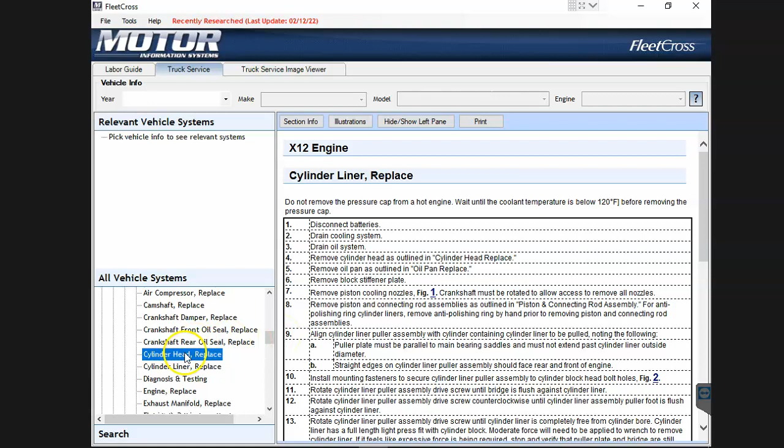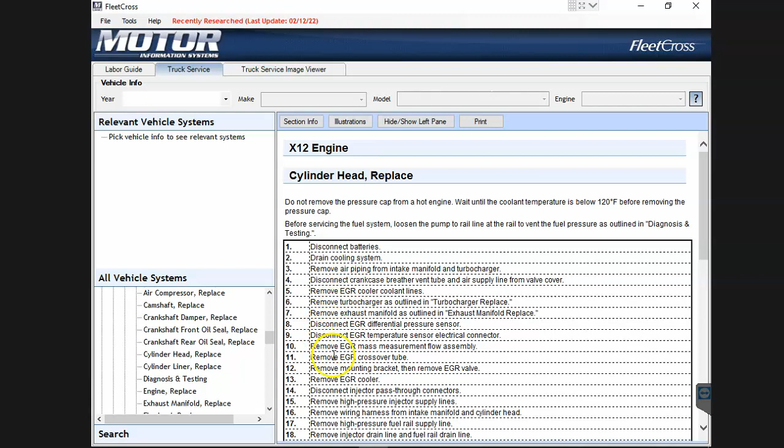Valve lash adjustment directions. Let's just take a look at one. Let's do the cylinder head. That's a big one that people need to know a lot of information on because you need torque specifications, maybe there's special tools involved. What do you need to do? So this is their information on how to remove a cylinder head. Not a lot of pictures, first off, and it just goes down through all the major steps. Disconnect this, remove that. I think most people probably don't even need a lot of that information.

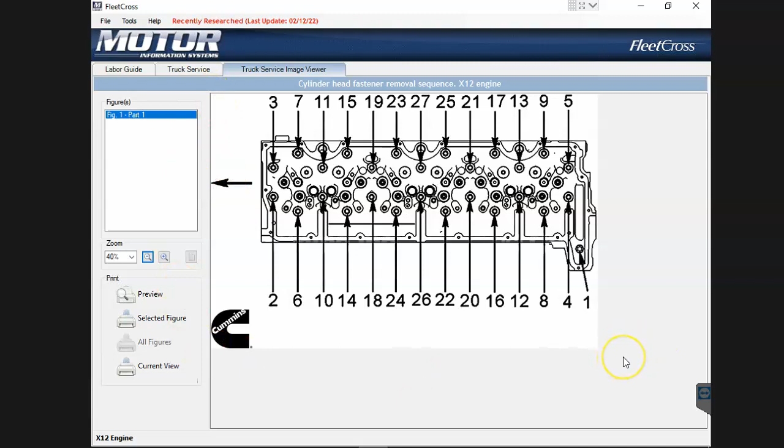But let's get down here to this: remove cylinder head fasteners and sequence, or remove and discard mounting fasteners. Number one, and we can see a picture. The interesting thing here is this is not their picture, this is just taken right from the Cummins service manuals. They took a screenshot. That's the exact thing they got sued for, or had some legal action taken against them with International. That's why there's zero International information in this entire platform.

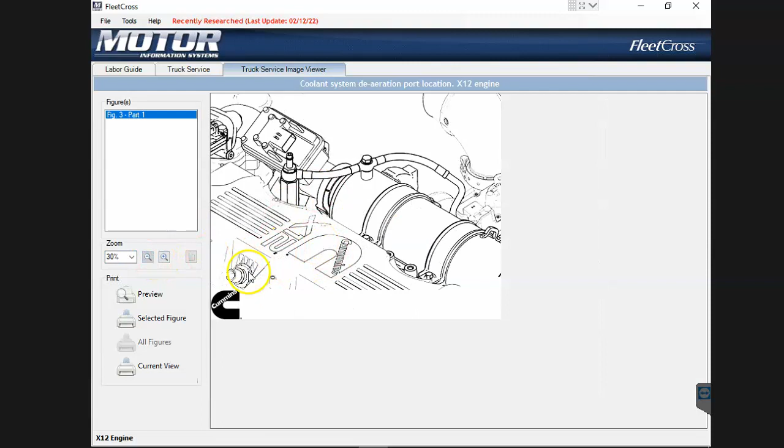But we can go down here and pull this one again, kind of cheating a little bit. Figure 1 and figure 2 are pretty much the exact same thing, I believe. And then they got some more pictures here, but it's just stuff taken right out of the Cummins service manual. Not bad though, at least it gives you a little bit, but it's missing a lot of important information.

For example, what are the torque specifications for the cylinder head bolts? Is everything here? As you can see, they just kind of rip right into it. Disconnect batteries, drain cooling system, and then boom, start ripping stuff off.

But let's compare that to diesel repair. So diesel repair, to find the same information, you go to technical repair docs, and we're going to have to go down this list and select what we're looking for. We're looking for a Cummins, which is an engine, and we got to select a type. We'll do a 2019, we'll do an X12, and we're going to do remove and replace instructions. So here we have a list of all the different components that are documented.

Let's go into cylinder head, and we're going to view this document. Again, free users get this, two of these a month they can do for free, paid users unlimited. So here's the X12 remove and replace.

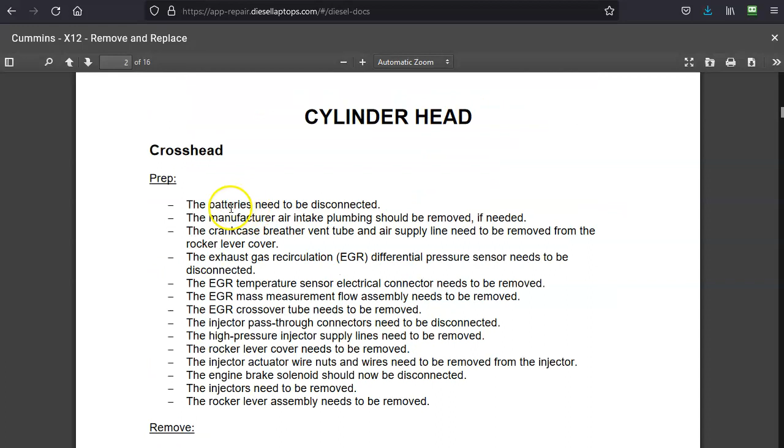Again, same kind of thing with the batteries and all these crankcase and pressure tubes, so it kind of goes through everything. So crosshead, that needs to come off first, walks you through all the steps in a lot more detail. So they had one page. This document is 16 pages of information in here.

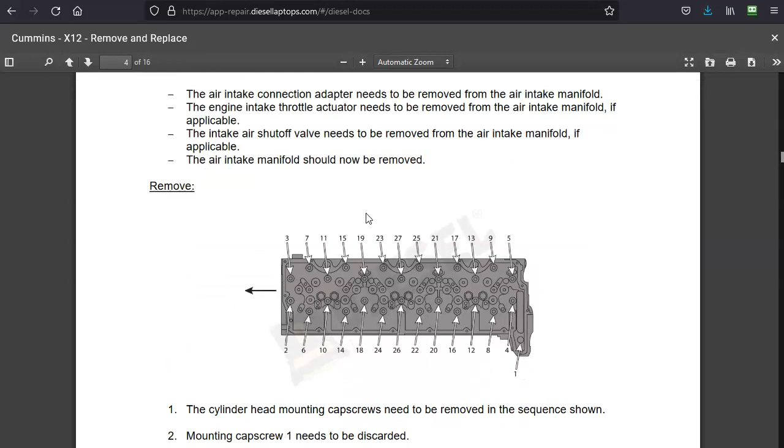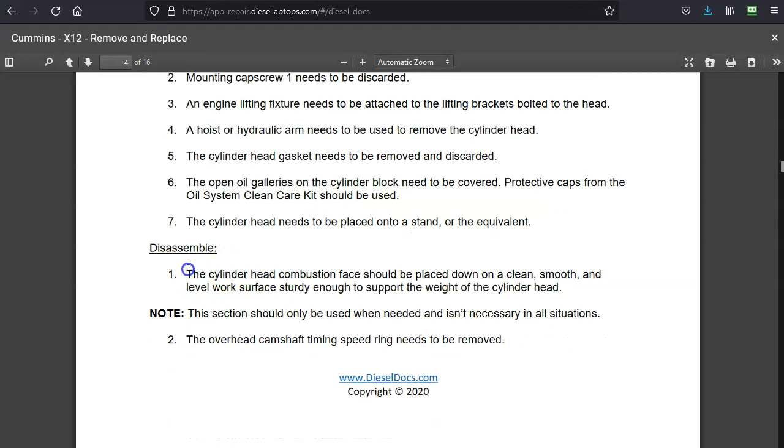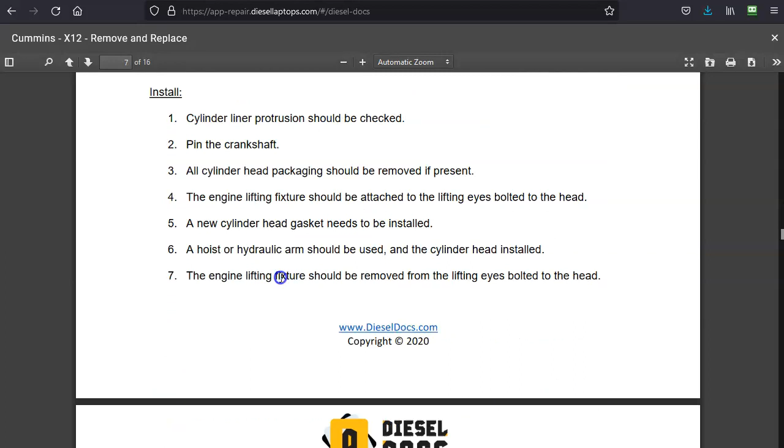And you can go through this. I think the other interesting thing here to note is there's some good information in here. Mounting cap screw head bolts, they call them cap screws, number one needs to get replaced, you can't reuse that. But it just kind of goes through here and really walks you down. You see we got torque specs, rotate 90 degrees, like you need to know those things to probably put this together, to prevent comebacks and ensure things are done.

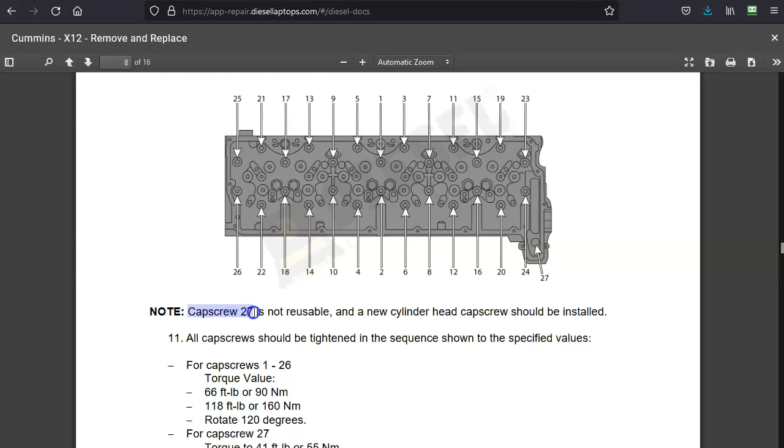And here's the installation, it goes in reverse, obviously, the installation. And it says, note, cap screw 27 is not reusable, a new cylinder cap screw should be installed. And again, there's different torque specs for 1 through 26 and for 27.

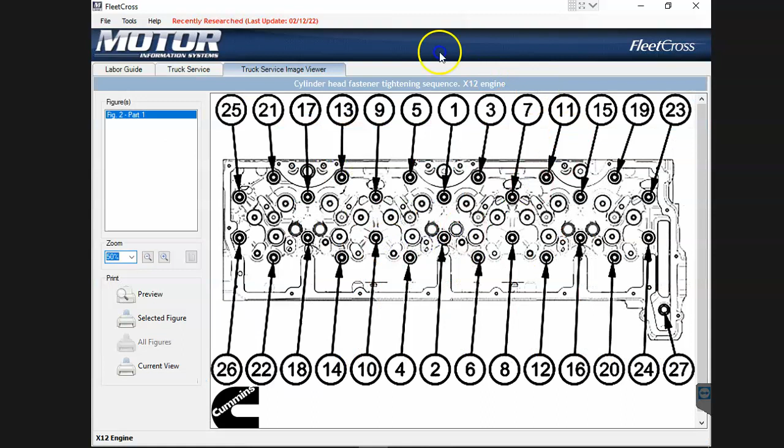If we compare that back again to the motors, I don't see torque specs listed anywhere in here. They're just not in here. It doesn't make a note about certain ones have to replace. It says remove and discard mounting fasteners, you actually can reuse them, just not a couple of them. But it just doesn't have all the information, right? So, tight mounting fasteners in sequence as illustrated - this tells you the sequence, doesn't tell you the torque specs. So it's kind of like that as you go through the entire thing, it's just really lacking information.

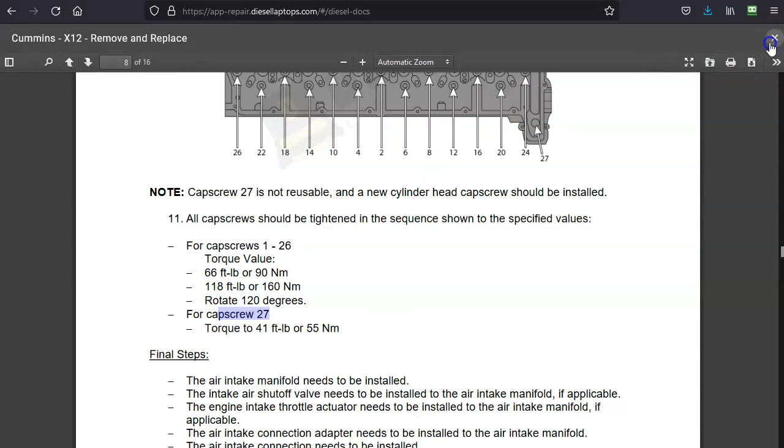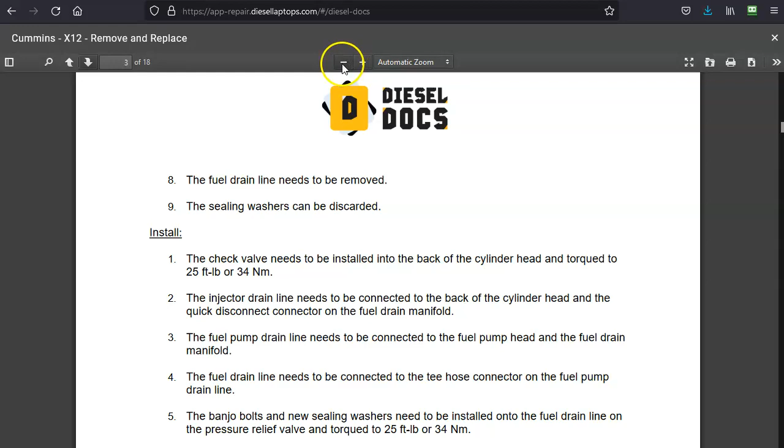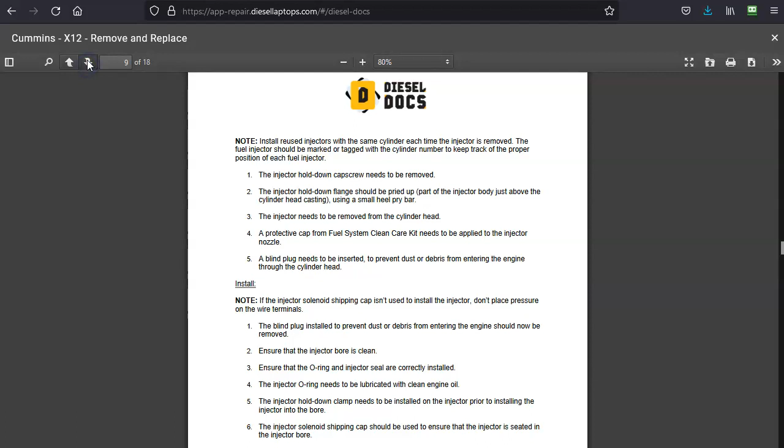So again, I'll show you an example with diesel repair, and let's go into the injectors and fuel lines. So again, we have an 18-page document. I'll actually zoom out a little bit here so you can see the whole page in the video. And we can go through, and you'll see a lot more detailed information, all the torque specs for every little component, everything you need to know. So we'll definitely put our remove and replace instructions head to head with anybody in the industry.

But thought you'd like to watch that. That is a review of the Motors FleetCross repair information system on remove and replace instructions, severely lacking in detail when they even have it. So for example, they got good Cummins information in there, but where's all my International engines? Of course, those aren't listed anywhere in there. Volvo, what do they actually have for Volvo D13?

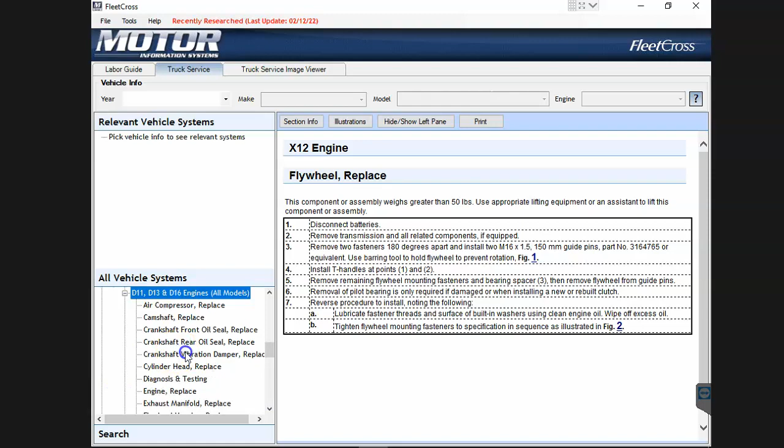They got, again, probably a little bit - actually these are almost looking a little bit similar, cylinder head. I'm just kind of curious now. Yeah, I guess they are different. So, but there it is, there's the directions. Hopefully this gives you a little bit of information and explains what the difference is between Motors FleetCross Repair Information and diesel repair.